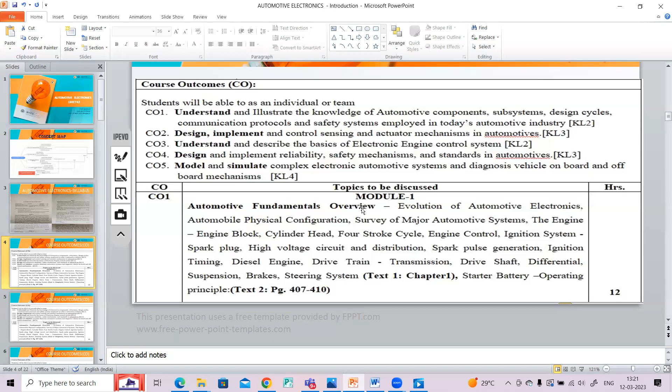So coming into the subject, that is automotive fundamentals, the first concept they have framed is evolution of automotive electronics.

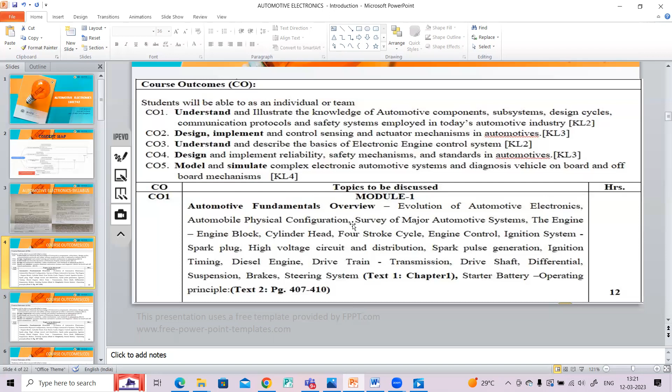If you try to see with respect to that, there is one concept I've framed, that is automotive fundamentals overview. So here, module one tells about the concept that we have framed.

Here we are going to discuss in-depth about the content telling about the automotive fundamentals overview along with the air fuel systems. It contains 12 hours duration to complete this, and I've framed it to complete within 10 hours.

That is with respect to the date planned and the date executed. Every class, with respect to the timetable according to the calendar of events, I'm going to frame it with the subtopics highlighted in the course manual, and the same will be shared on the MS Teams link also.

So first I'm going to start with automotive fundamentals overview. I'm going to discuss about the four-stroke engine and engine control, because we are touching in-depth discussion about the automobile sector.

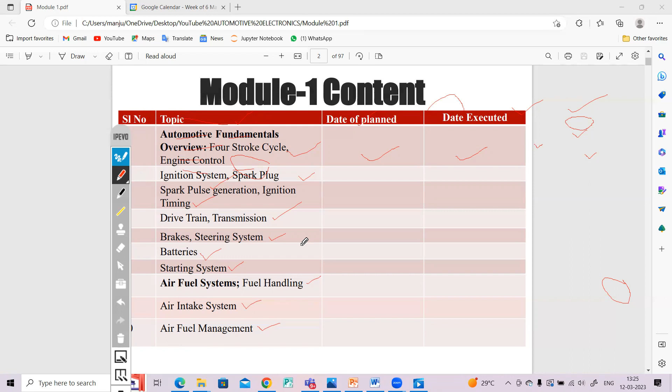Okay, so this is all related to the Module 1 content here. I think we won't have any doubts related to the topic shown in my slide. So coming to fundamentals, that is the four-stroke engine.

Let me go with some physical overview, that is the configuration of the engine, that is the automobile. So here these systems include the following. To form the automobile physical configuration, the first important one is the heart, that is nothing but the engine.

Then we'll discuss about the drivetrain. There we'll see what type of transmission we are going to see, and what type of differential space we are going to see, and how the axles play an important role.

And we'll see the suspension, that is mono suspension, and some suspension to make comfort using drum brakes and so on. There we are going to see the suspension here, something disc or drum brakes, and the steering, either it's power steering, manual steering, or semi-manual, and the brakes, like suspension - mono suspension and dual suspension.

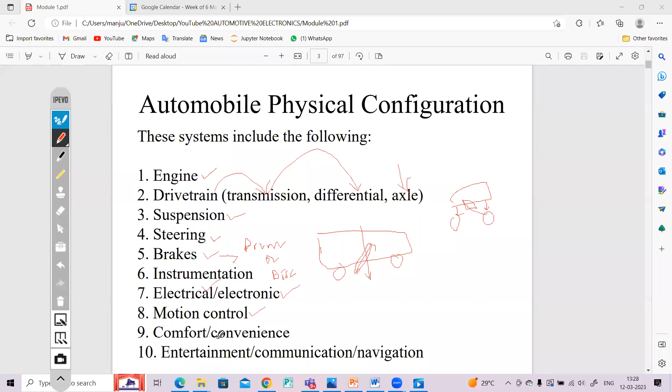Then comfort, convenience, and entertainment, communication, and navigation, like Bluetooth connectivity and onboard MP3 player, or onboard FM, or onboard navigators, or onboard call connectivity. Navigator means nothing but the tracking of that respective road, using the Global Positioning System. And communication in the form of technology we are going to use, like Wi-Fi and Bluetooth - while driving, we are able to get connected and able to make calls also.

So voice calls or video calls. In the front console, we're showcasing all measurements like efficiency of petrol, then trip details, and this type of entertainment communication is going to be seen there. It's all related to automobile physical configuration, which includes everything from engine to entertainment.

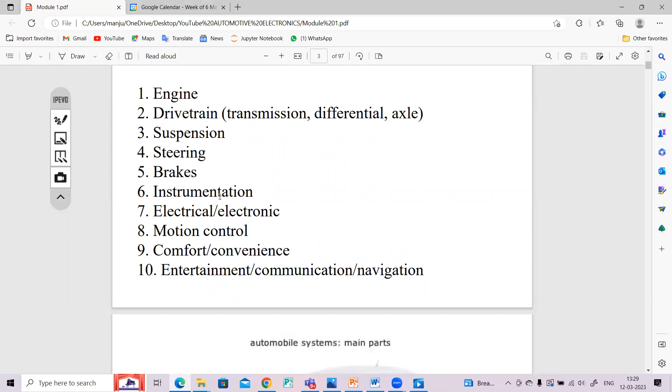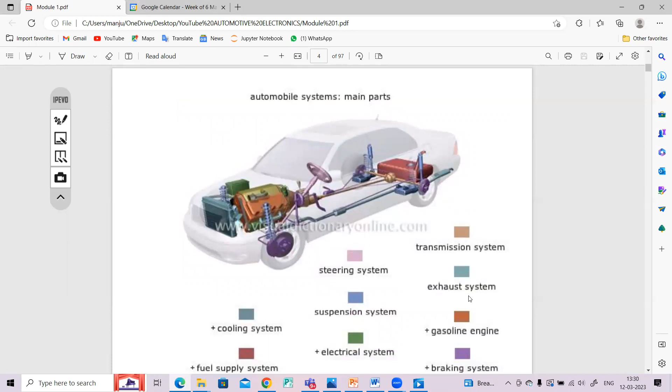Okay, so coming to the automobile system main parts. This is very important - she is coming into the automobile system. As I told, it's related to the automobile sector along with some electronic components that are going to be added to make this vehicle smart.